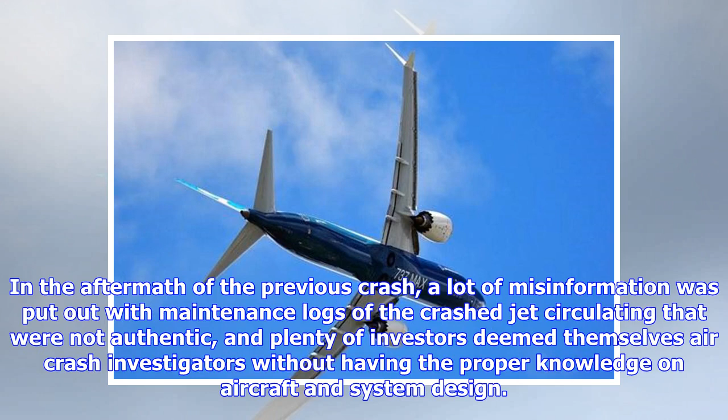In the aftermath of the previous crash, a lot of misinformation was put out with maintenance logs of the crashed jet circulating that were not authentic, and plenty of investors deemed themselves air crash investigators without having the proper knowledge on aircraft and system design.

Source: The New Yorker. When analyzing the Lion Air Boeing 737 MAX 8 crash in October 2018 using my aerospace engineering background, I provided a look at the stability systems in aircraft and explained what changed on the Boeing 737 MAX, as well as my view on one of the key added systems that seems to be causing troubles on the Boeing 737 MAX.

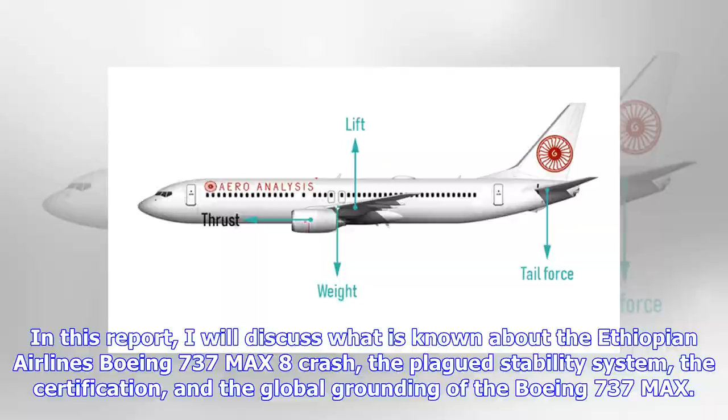In this report, I will discuss what is known about the Ethiopian Airlines Boeing 737 MAX 8 crash, the plagued stability system, the certification, and the global grounding of the Boeing 737 MAX. All of these subjects will be discussed from a technical point of view.

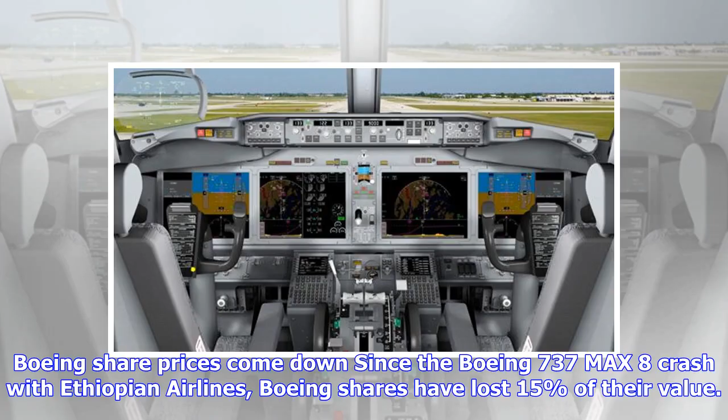In a separate report, I will be providing my view on possible costs of the global grounding of the Boeing 737 MAX. Boeing share price has come down since the Boeing 737 MAX 8 crash with Ethiopian Airlines. Boeing shares have lost 15% of their value.

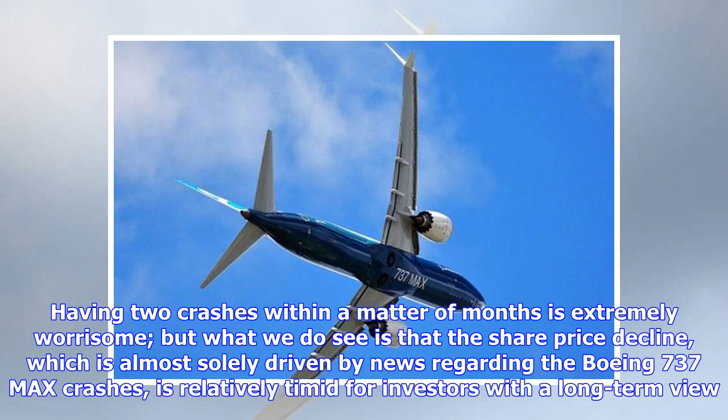Having two crashes within a matter of months is extremely worrisome, but what we do see is that the share price decline, which is almost solely driven by news regarding the Boeing 737 MAX crashes, is relatively timid for investors with a long-term view. Obviously, if a worst-case scenario is being considered, the downside, going forward, is significant.

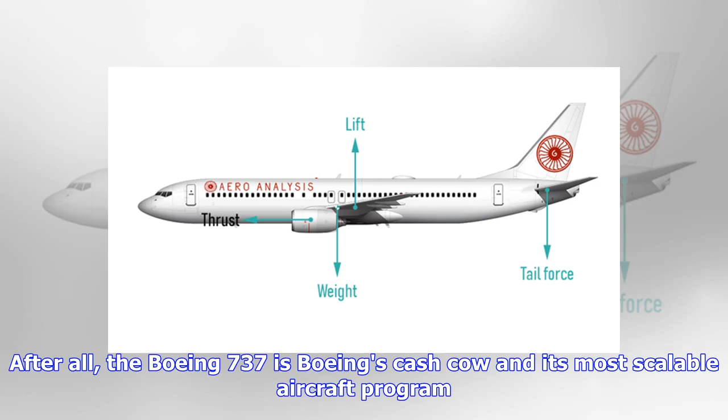But if you currently went solely by the headlines, you would think that Boeing has lost half of its value, and that is not the case. Given the current circumstance, I do believe the downward pressure on shares is more than justified. After all, the Boeing 737 is Boeing's cash cow and its most scalable aircraft program. With the lower share prices, I don't feel that the risk-reward profile has improved.

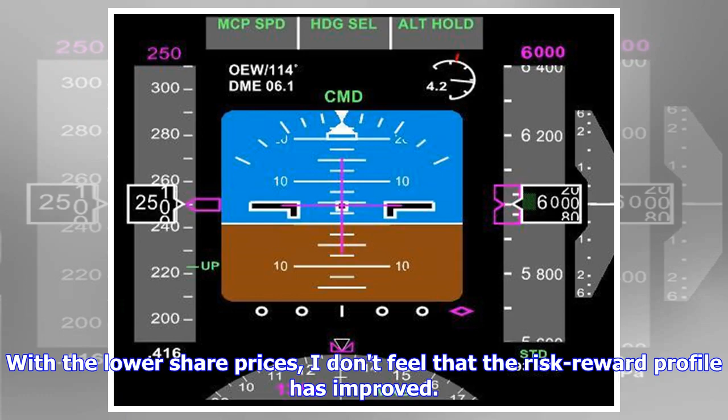After all, there is a risk of cost growth, which will almost certainly be present due to the grounding of the Boeing 737 MAX. Ethiopian Airlines Flight ET302. Source: Flight Global. Ethiopian Airlines Flight ET302 was a flight from Addis Ababa to Nairobi.

The flight is usually operated with either a Boeing 737-800 or a Boeing 737 MAX 8, and on some occasions even a Boeing 787. On the 10th of March 2019, shortly after takeoff, the pilot of a Boeing 737 MAX 8 with registration ET-AVJ requested a return to the airport of Addis Ababa due to technical issues.

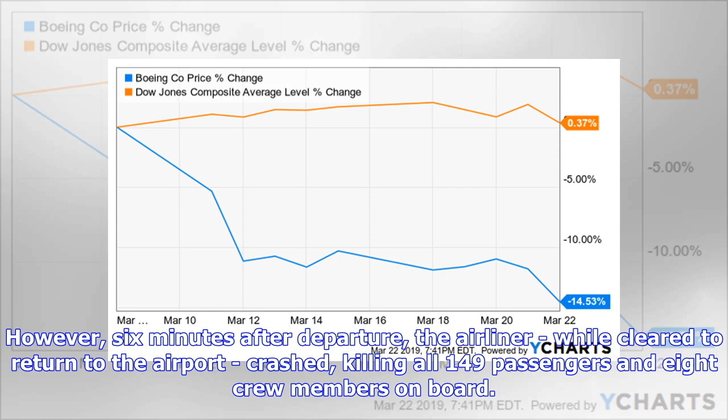However, 6 minutes after departure, the airliner, while cleared to return to the airport, crashed, killing all 149 passengers and 8 crew members on board. No adverse weather conditions were reported.

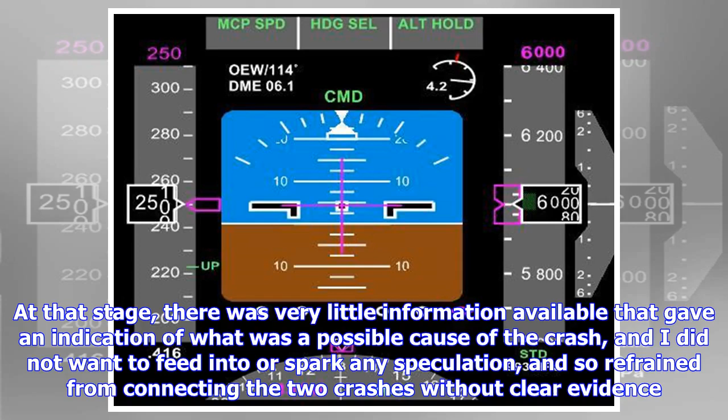Shortly after the accident occurred and with no granular data available, I was already asked to cover the crash and comment on the cause. At that stage, there was very little information available that gave an indication of what was a possible cause of the crash, and I did not want to feed into or spark any speculation, and so refrained from connecting the two crashes without clear evidence.

Currently, more information is known, but there has been no release of even a preliminary report, which is issued within 30 days after a crash. The fact is, however, that this crash marks the second one with a Boeing 737 MAX 8 in 5 months, as well as the second crash since commercial service entry. For an industry that can normally pride itself with an impressive safety record, this is reason for concern.

Shortly after the crash, we observed that both accidents occurred after takeoff during the climb away from the airport, that both flight crews intended to return to their departure airport but were unable to do so, and that both flights were carried out using brand new Boeing 737 MAX 8 aircraft. Later, it was also found that the horizontal stabilizer position was in a nose-down position similar to what happened to the Lion Air MAX 8, and we found the speed to be unusually high.

The aircraft, a Boeing 737 MAX with registration ET-AVJ, was delivered to Ethiopian Airlines on the 15th of November, meaning that it was a little over 100 days old at the time of the crash. It is important to take into account that, without the information on the stabilizer position and/or communications between the air traffic controllers and the flight crew, one could only guess or speculate that these crashes might have had the same cause.

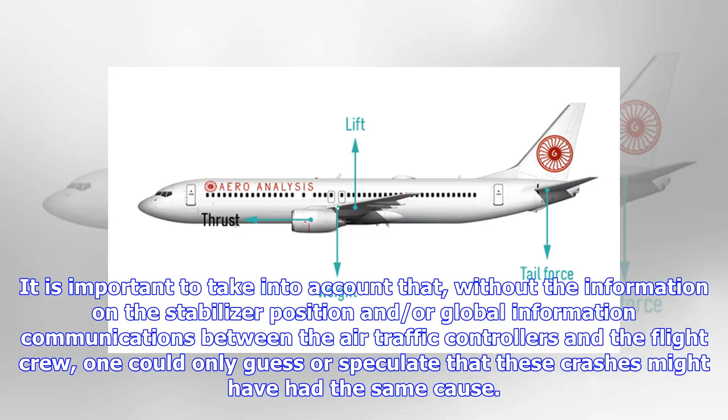Boeing 737 MAX, more than new engines. One of the reasons the problems with the Boeing 737 MAX are somewhat of a surprise is that the Boeing 737 Next Generation has a good safety record, and the Boeing 737 MAX is often seen by others as a re-engined version of the Boeing 737 Next Generation.

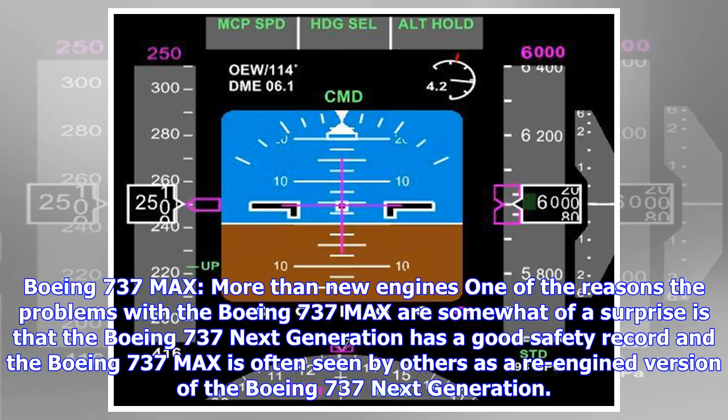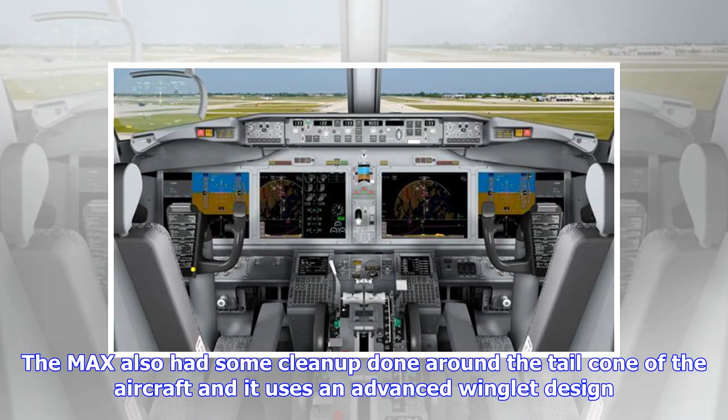Reality, however, is slightly different. The Boeing 737 MAX used CFM LEAP 1B turbofans, which are more efficient than the CFM56-7B series used on the Boeing 737 Next Generation. MAX also had some cleanup done around the tail cone of the aircraft, and it uses an advanced winglet design. These elements reduce the fuel burn of the aircraft, but what is not often considered is the influence this has on stability of the aircraft.

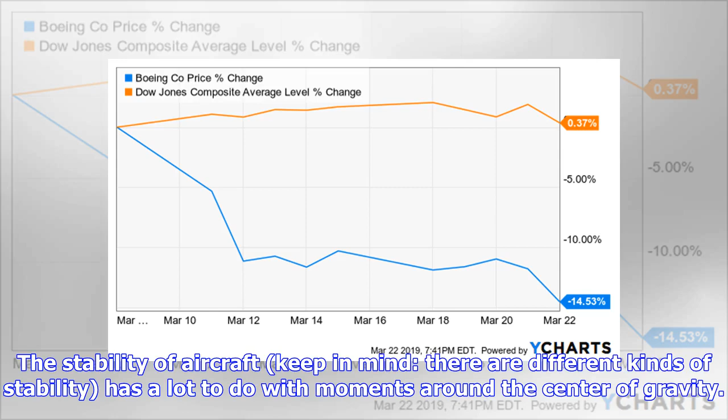Figure 1. Typical setup. Source: Aero Analysis International. When reading the following 4 paragraphs, please keep an eye on Figure 1 to get a better visualization. The stability of aircraft, keep in mind there are different kinds of stability, has a lot to do with moments around the center of gravity. One of those important moments is the pitching moment. What we see in Figure 1 are the forces acting on an aircraft.

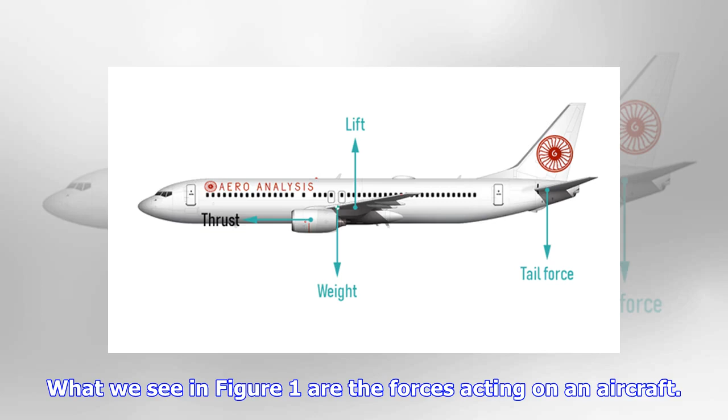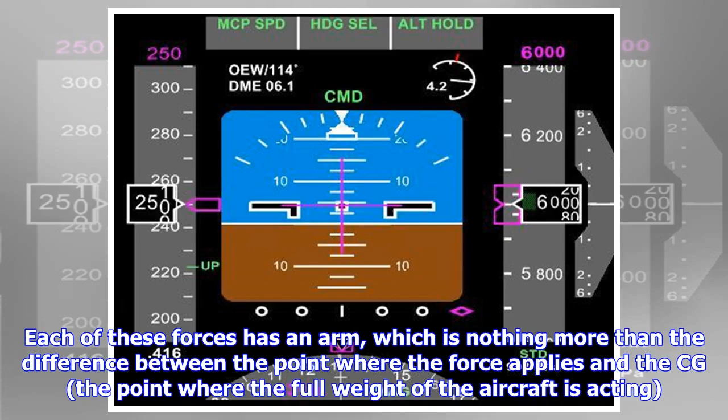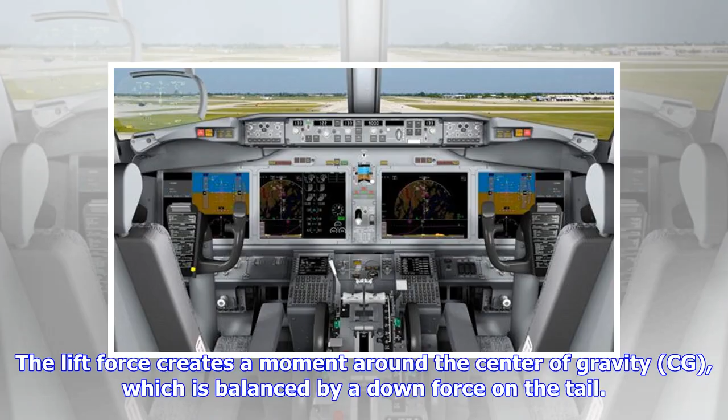Each of these forces has an arm, which is nothing more than the difference between the point where the force applies and the CG, the point where the full weight of the aircraft is acting. Ideally, aircraft have a center of gravity that is placed in front of the center of pressure of the wing, which is the point where the resultant lift force is applied. The lift force creates a moment around the center of gravity, CG, which is balanced by a down force on the tail.

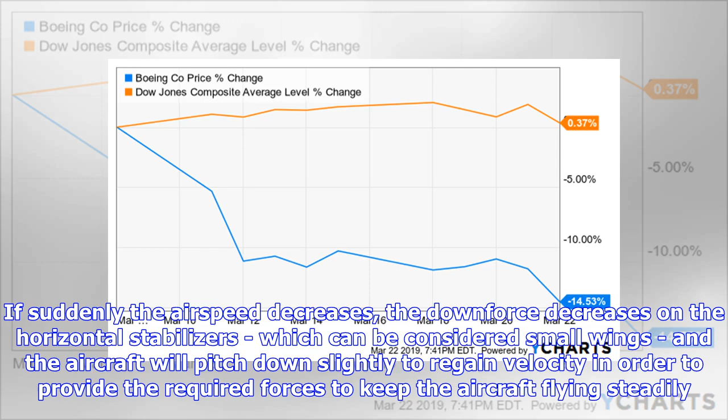What this particular setup with the CG in front of the center of pressure is good for is stability. The force on the surfaces scales with the velocity squared. If suddenly the airspeed decreases, the downforce decreases on the horizontal stabilizers, which can be considered small wings, and the aircraft will pitch down slightly to regain velocity in order to provide the required forces to keep the aircraft flying steadily. The same, but in opposite sense, holds for a sudden increase in velocity. This is known as positive static stability.

Additionally, if the CG does not lie on the same line with the point where the thrust force is applied, there also is a pitch-up moment from the turbofans. That is where the new turbofans play a role. The new turbofans are not only more efficient, they are also more powerful and placed slightly higher and more forward on the wing. The result is that the nacelles generate some more lift in front of the center of gravity, which works as slightly destabilizing, and the more powerful turbofans generate a bigger pitch-up tendency for the aircraft.

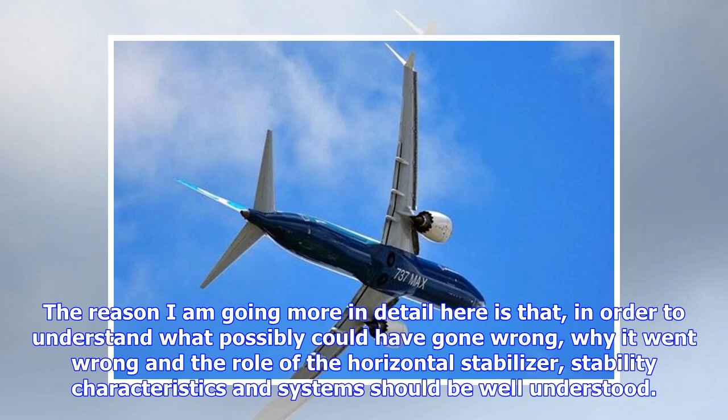The reason I am going more in detail here is that, in order to understand what possibly could have gone wrong, why it went wrong and the role of the horizontal stabilizer, stability characteristics and systems should be well understood. It is important to have a stable aircraft that doesn't contribute to further destabilizing behavior when moved from its equilibrium point.

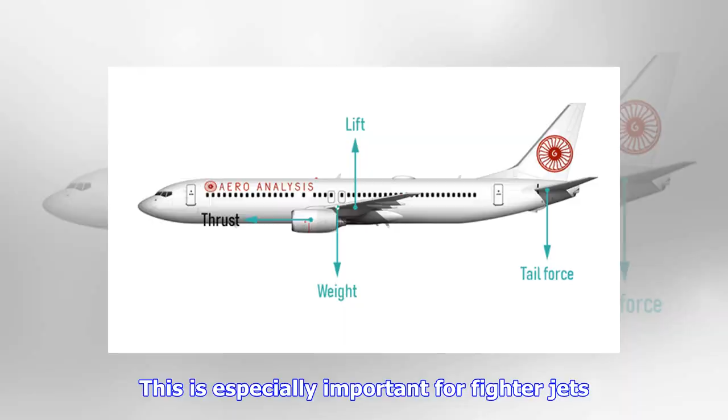It is possibly one of the hardest things for which to naturally or aerodynamically design the aircraft. That is also the reason aircraft, and primarily fighter jets, can nowadays be designed with unstable behavior and the aircraft is stabilized by computer systems. This improves maneuverability characteristics. This is especially important for fighter jets. For passenger jets, designing aerodynamically stable aircraft is still desired, and unstable characteristics can be handled by augmentation systems if needed. Having a forward CG has some stability benefits.

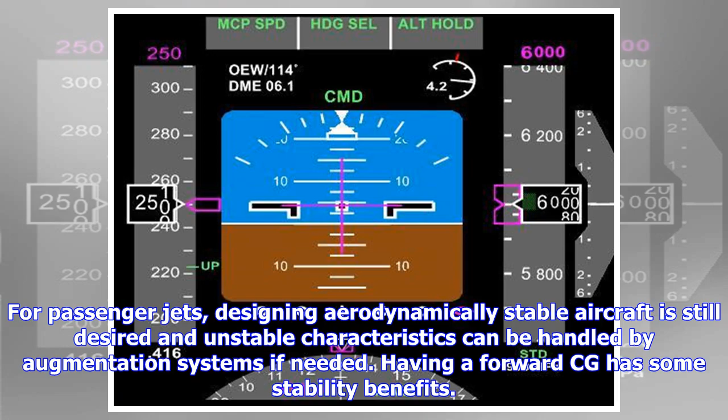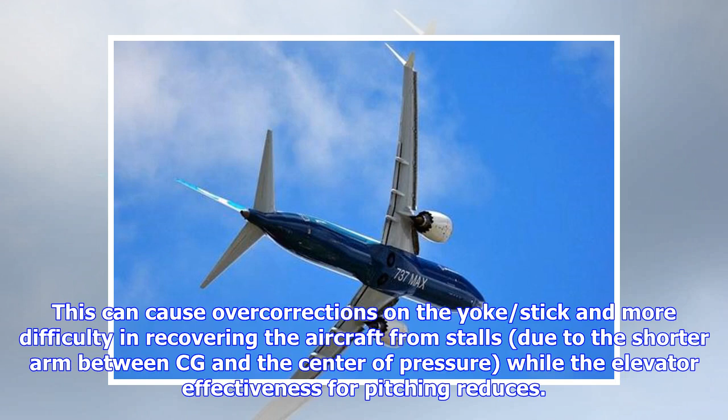The CG, however, is not a fixed point and changes based on loading and even changes as the aircraft consumes fuel from its tanks. In an aircraft that flies nearly empty, the CG will shift more aft and that will ultimately result in a reduced moment arm for the tail force and lift force, and less tail force, resulting in less control force required by the pilot. This can cause overcorrections on the yoke or stick and more difficulty in recovering the aircraft from stalls, due to the shorter arm between CG and the center of pressure, while the elevator effectiveness for pitching reduces. This, however, is not bad design or dangerous. The aircraft should be easily operable within the limits set by the manufacturer.

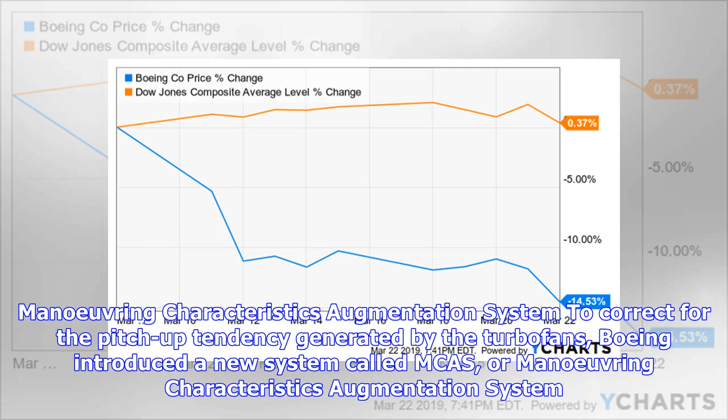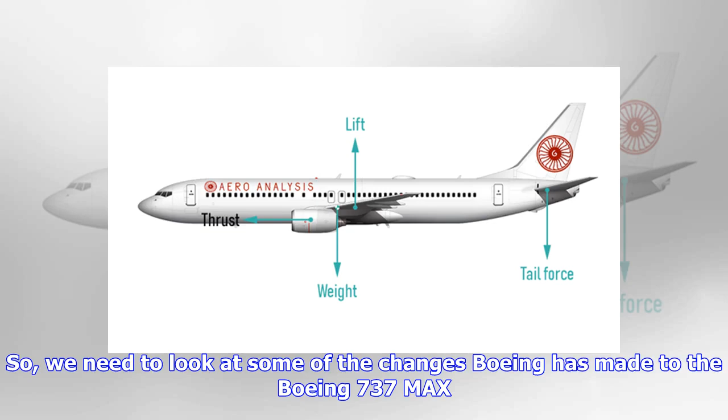Maneuvering Characteristics Augmentation System. To correct for the pitch-up tendency generated by the turbofans, Boeing introduced a new system called MCAS, or Maneuvering Characteristics Augmentation System. Before we explain what the system does, we need to look at why Boeing implemented it. So, we need to look at some of the changes Boeing has made to the Boeing 737 MAX.

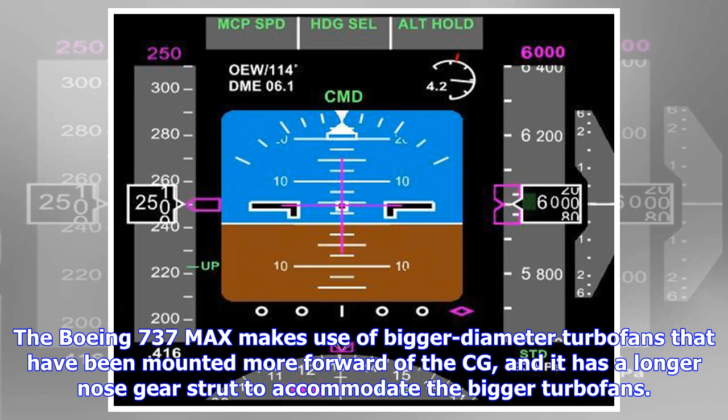The Boeing 737 MAX makes use of bigger diameter turbofans that have been mounted more forward of the CG, and it has a longer nose gear strut to accommodate the bigger turbofans. Those are items that add weight to the aircraft in front of the CG and would make the aircraft pitch down. So, it changes how the aircraft would handle as compared with the previous generation Boeing 737.

Additionally, there is quite a difference in the thrust capabilities. The turbofan powering the Boeing 737 NG series, the CFM56-7B series, has a continuous thrust of 115.2 kN, while the CFM LEAP 1B series that powers the Boeing 737 MAX has a continuous thrust of 127.6 kN, which is a 10% increase. So that would create a pitch-up moment that the Boeing 737 NG has to a lesser extent.

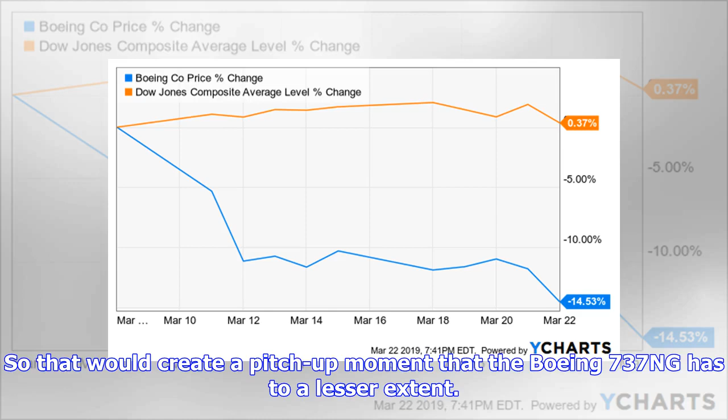Additionally, these bigger turbofan diameters possibly cause the nacelles, the housing of the turbofan, to generate lift or more lift at higher angles of attack, the angle between the aircraft body or wing chord and the relative wind, inducing a further pitch-up moment. This all adds to the instability of the aircraft and makes it harder to control at higher angles of attack during high-thrust situations, since the aircraft will tend to pitch up while stall prevention or recovery requires a pitch-down motion.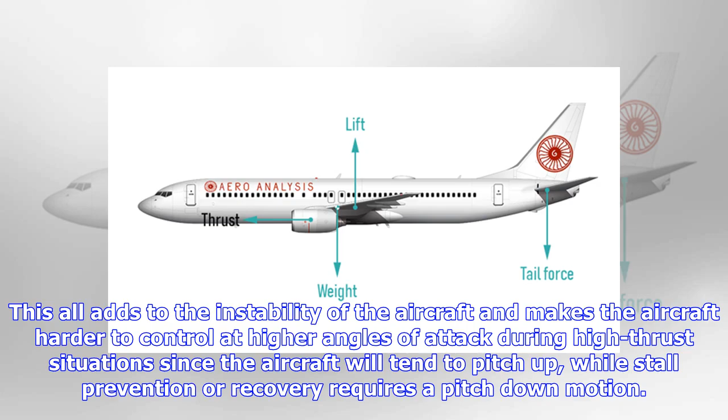The particular combination of high thrust and high angles of attack is typical for the takeoff phase of the flight.

The MCAS is the system on the Boeing 737 MAX that went from an unknown system to the most known system on the aircraft. Fact is that if there had been no crash, nobody would have known that the system had malfunctioned or that it had even existed.

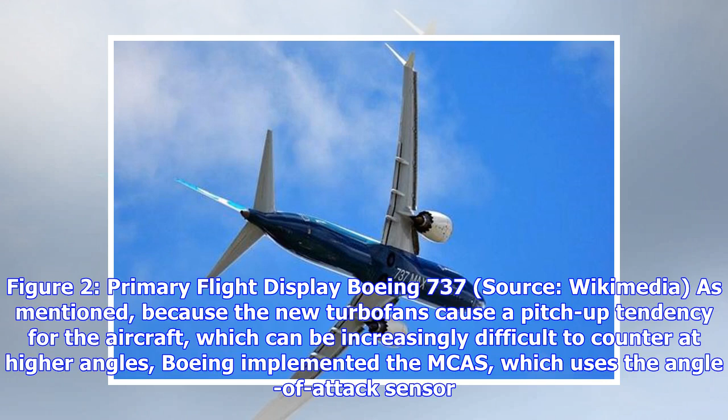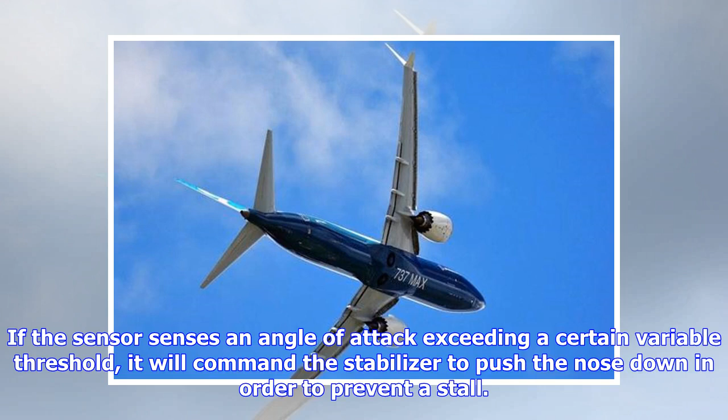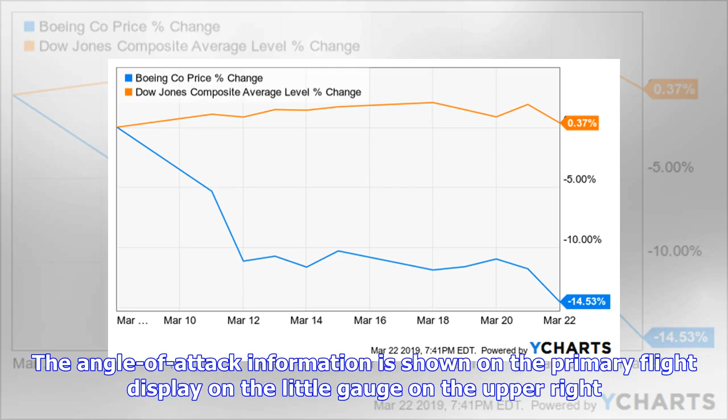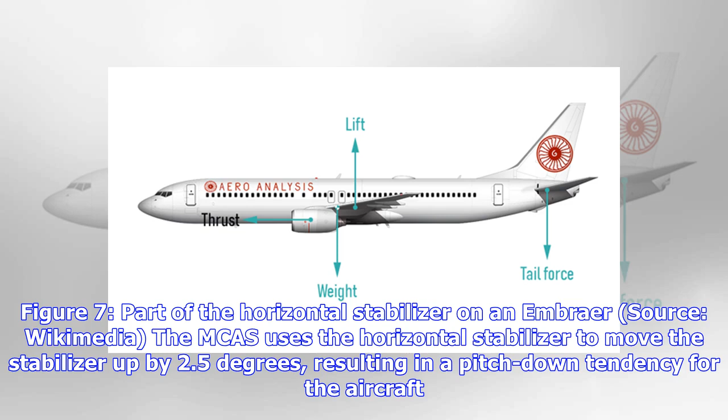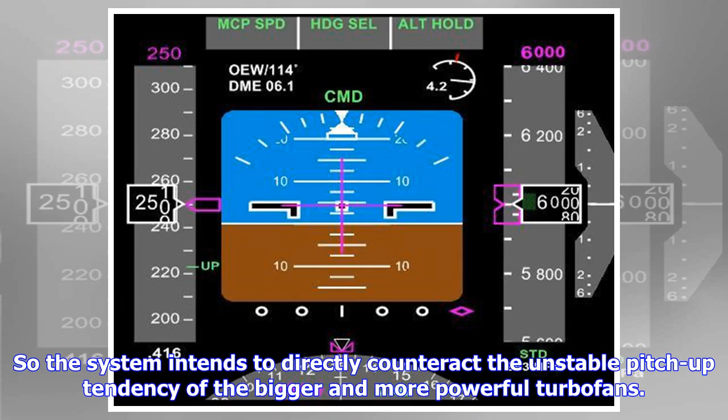What seems to have happened for the second time now is that the nose of the aircraft has been pushed down, likely due to wrong input from an angle of attack sensor.

Boeing's role during the first crash in October: I was already critical of Boeing's role in MCAS design, something that hasn't always been appreciated by Boeing investors.

Boeing introduced the MCAS system, and the rationale behind it is very simple. The Boeing 737 MAX is slightly more unstable, so they introduced a system that should help crews avoid stalling. We think they should have informed crews about it. Boeing said it did not disclose the system to pilots in order to avoid flooding them with information.

We think following that rationale is only partially justified. The MCAS is a stall prevention system, and it could indeed partially defeat the purpose of the system if you tell pilots about it and tell them how to circumvent that. But if the system is not tuned or designed correctly, you had better make sure that crews know how to deactivate the system reflexively without them having to look for the right checklists.

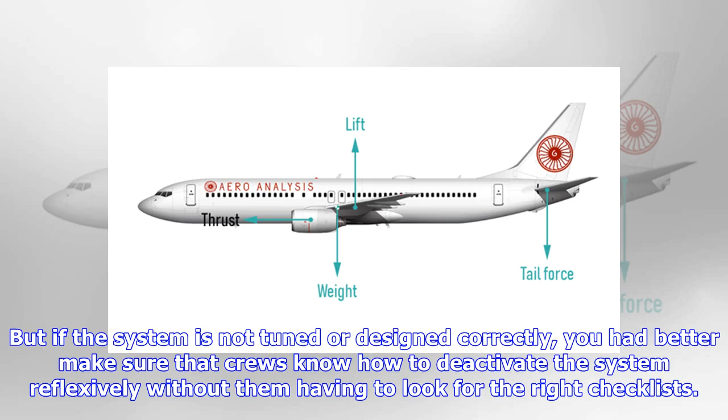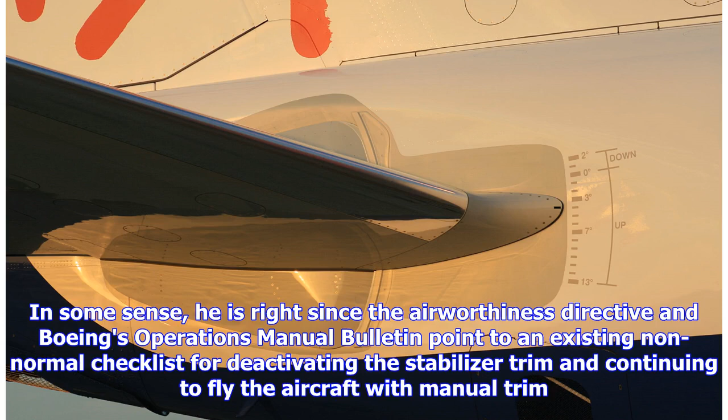Boeing CEO Dennis Muilenburg said that they disclosed everything necessary to fly the aircraft safely. In some sense, he is right, since the Airworthiness Directive and Boeing's Operations Manual Bulletin point to an existing non-normal checklist for deactivating the stabilizer trim and continuing to fly the aircraft with manual trim. This would have deactivated the MCAS, which is the system that pilots didn't know about.

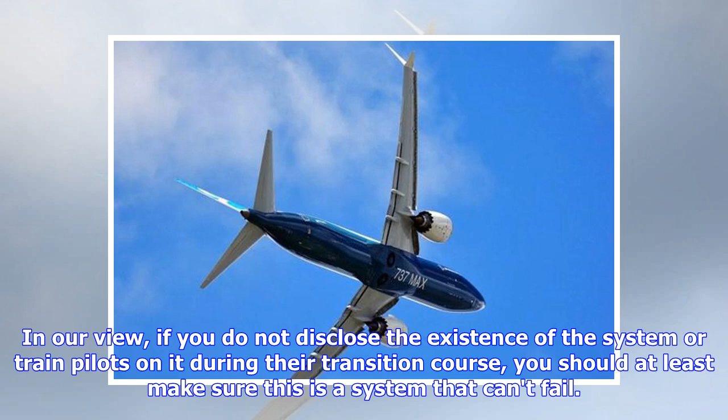What was missing, however, was the link between horizontal stabilizer, MCAS, and the angle of attack sensor in the checklist. In our view, if you do not disclose the existence of the system or train pilots on it during their transition course, you should at least make sure this is a system that can't fail. This is nearly impossible.

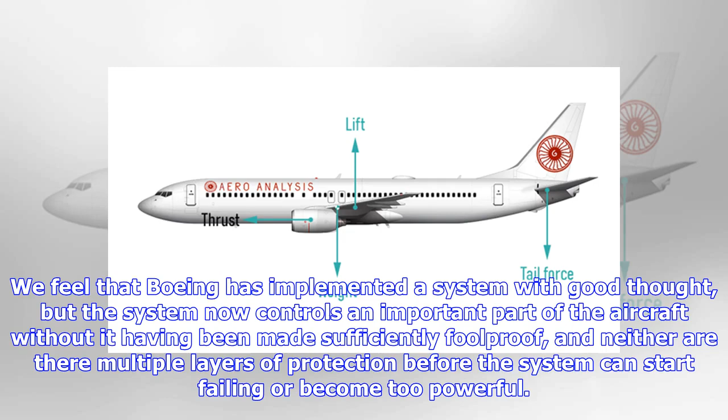So it is desirable to build in some buffer in the form of additional sensors, for example, besides the left-right sensors for the left and right seat of the flight deck. We feel that Boeing has implemented a system with good thought, but the system now controls an important part of the aircraft without it having been made sufficiently foolproof, and neither are there multiple layers of protection before the system can start failing or become too powerful.

We think Boeing should have documented the changes during the transition course for pilots and added explanation as to how the MCAS and STS are different and whether they even coexist on the Boeing 737 MAX.

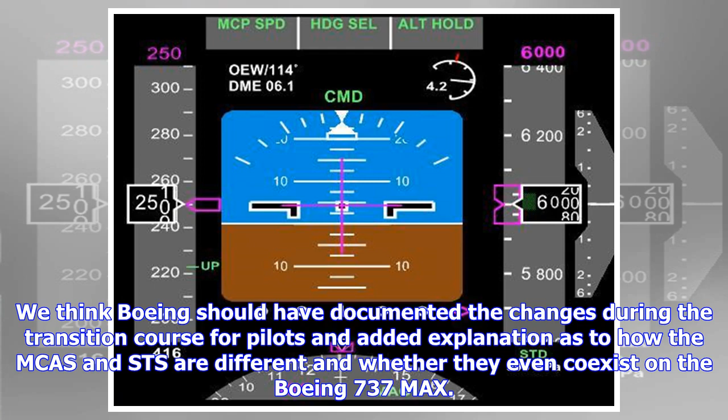All of the above might sound extremely familiar to those who have read my coverage on the Lion Air crash, because my view on Boeing's MCAS design, information and training has remained unchanged.

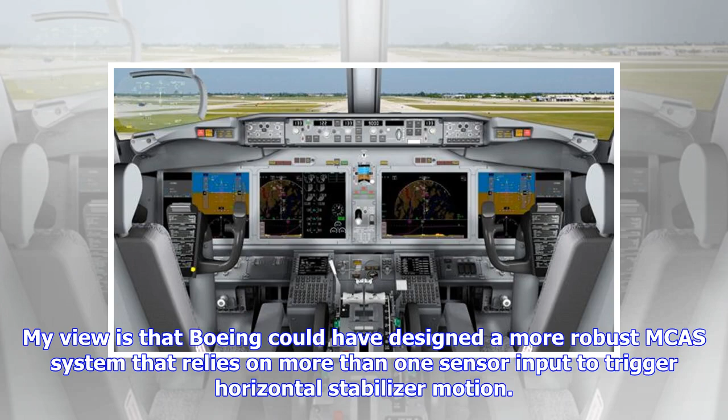My view is that Boeing could have designed a more robust MCAS system that relies on more than one sensor input to trigger horizontal stabilizer motion. In not doing so, Boeing has greatly underestimated the importance of the system and the adverse consequences of system failure with regard to controllability of the aircraft.

Boeing engineers undoubtedly are extremely talented, and workers take pride in building Boeing jets, but if you have an aerospace engineering background, you can only conclude that the MCAS design has been suboptimal.

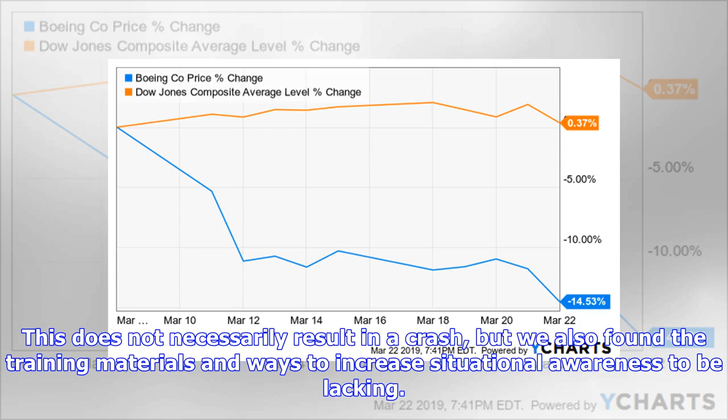This does not necessarily result in a crash, but we also found the training materials and ways to increase situational awareness to be lacking. The training simulators don't even deal with MCAS failure scenarios. If you combine this with lacking documentation and inferior system design, you can only conclude that Boeing did not give flight crews the tools and knowledge to fully understand the differences between the MAX and the NG and to deal with MCAS failures.

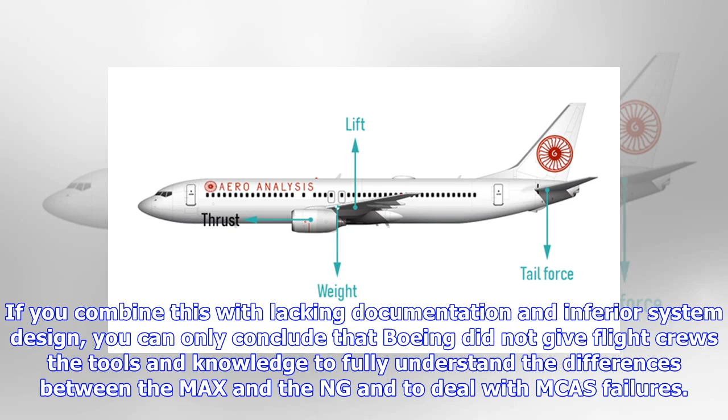Boeing's role is not just to design, flight test, acquire certification, assemble and deliver aircraft. It also has a role in ascertaining robustness of the training materials available to those flying the aircraft.

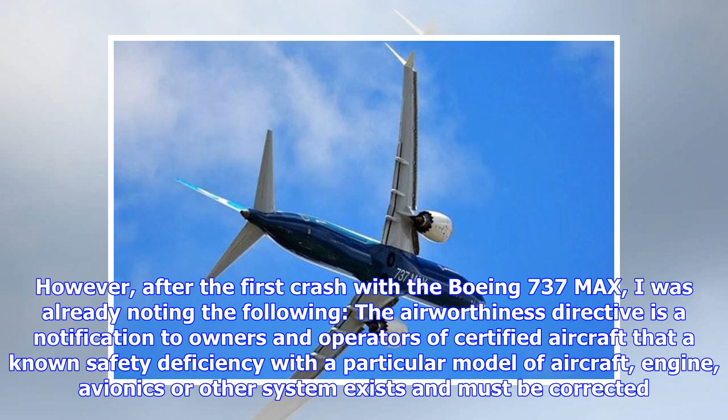Currently, the role of the Federal Aviation Administration is being probed, and this has come as a shock to many. However, after the first crash with the Boeing 737 MAX, I was already noting the following: the Airworthiness Directive is a notification to owners and operators of certified aircraft that a known safety deficiency with a particular model of aircraft, engine, avionics or other system exists and must be corrected. So it's an extremely strong sign from the FAA.

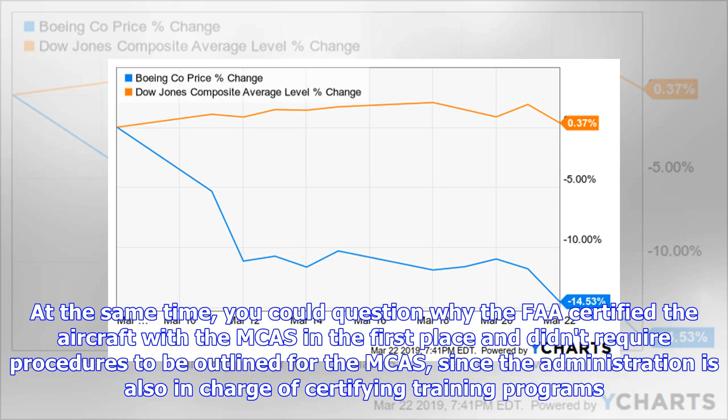At the same time, you could question why the FAA certified the aircraft with the MCAS in the first place and didn't require procedures to be outlined for the MCAS, since the administration is also in charge of certifying training programs. The FAA is likely the most capable aviation certifying administration in the world, yet they seem to know about the MCAS and did not require additional pilot training on the MCAS.

The Brazilian administration did require additional training on the anti-stall system.

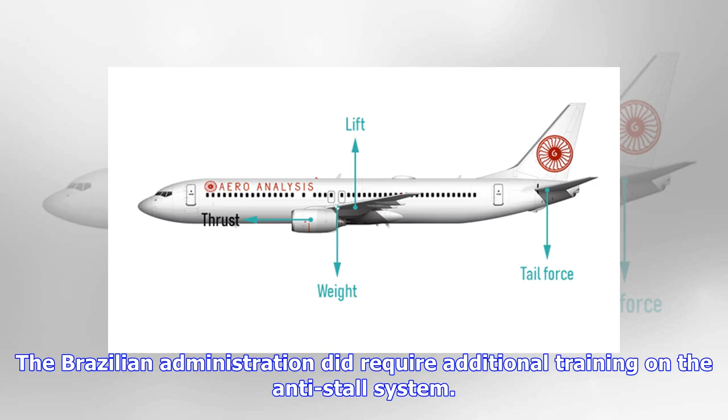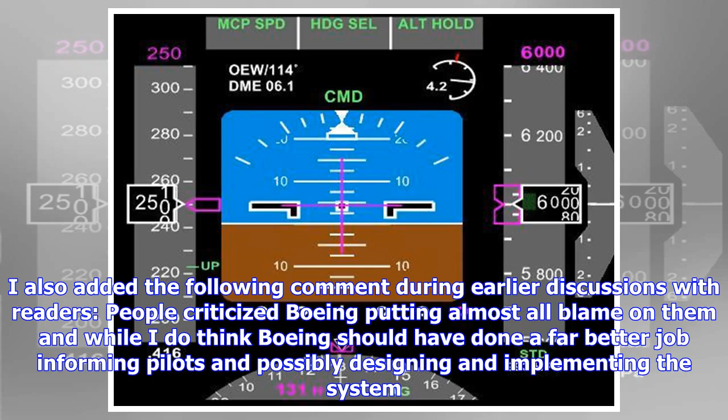I also added the following comment during earlier discussions with readers. People criticized Boeing, putting almost all blame on them, and while I do think Boeing should have done a far better job informing pilots and possibly designing and implementing the system, also the role of the FAA should be investigated to see whether they actually have the capabilities to certify aircraft that are

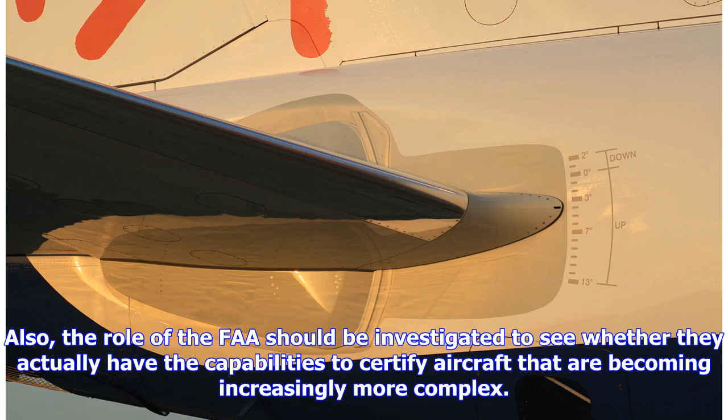becoming increasingly more complex. You could say that what is making headlines today, readers on Seeking Alpha were already made aware of in December 2018.

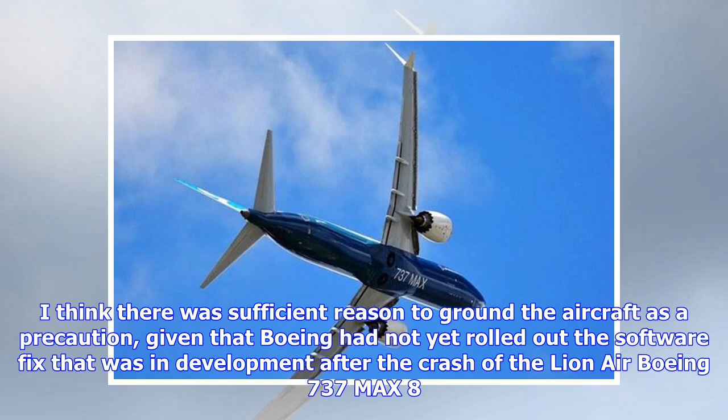In the aftermath of the Ethiopian Airlines crash, China initiated the grounding of the Boeing 737 MAX. I think there was sufficient reason to ground the aircraft as a precaution, given that Boeing had not yet rolled out the software fix that was in development after the crash of the Lion Air Boeing 737 MAX 8. One thing to consider is that China operates nearly 100 Boeing 737 MAX aircraft that it relies on to support demand for air travel, so the grounding should be viewed in the safety and demand framework rather than that of the trade war and politics.

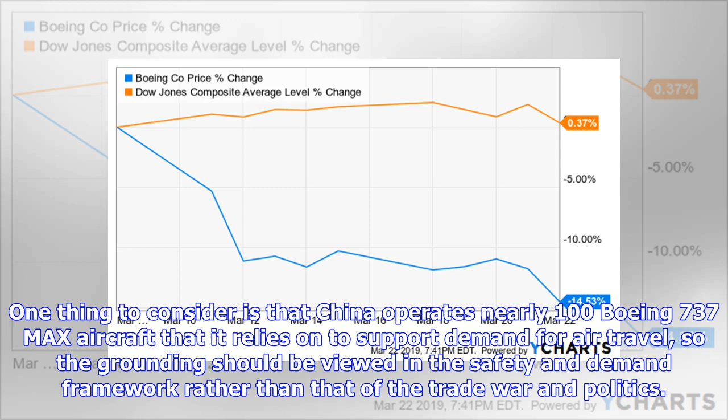It is of importance to China that passenger confidence in the Boeing 737 MAX is not eroded any further because Airbus, COMAC simply can't support the demand for single-aisle jets by themselves.

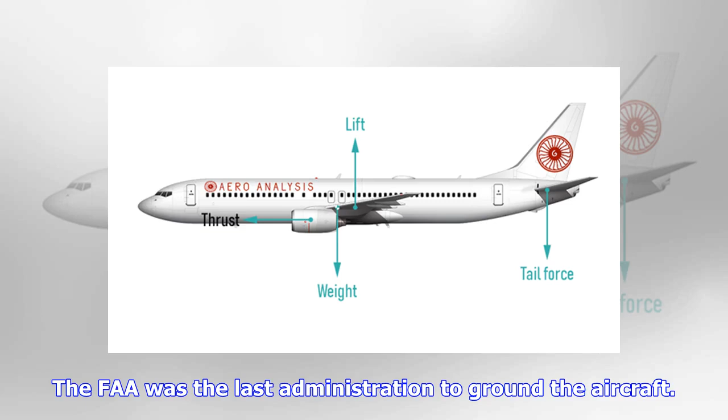The FAA was the last administration to ground the aircraft. Why the FAA did not ground the jet earlier is not clear, but I can imagine it is because the FAA does not get off scot-free in this case.

In the aftermath of the first crash, Boeing had been working on a software fix that would have turned off the MCAS in case the pilot opposed the MCAS system multiple times. The way it looks now is that neither Boeing nor the FAA has properly assessed the power of the MCAS system, and they have underestimated the consequences of the failure of this particular system.

This raises the question as to how the FAA was able to certify something when they didn't understand the extent to which it affects the stability of the aircraft. The question that would immediately follow is how the FAA determined the Boeing 737 MAX was safe to fly after the Lion Air crash and issued a continued airworthiness directive after the Ethiopian Airlines crash. It simply does not add up.

You could even say that the FAA, having been the last to ground the aircraft and even having issued a continued airworthiness directive, has gambled its own credibility.

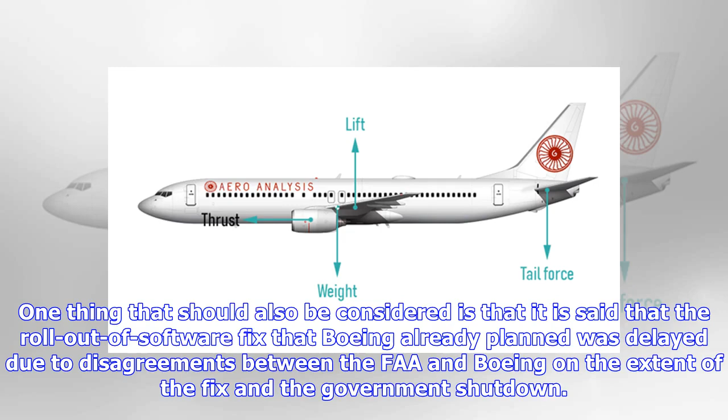One thing that should also be considered is that it is said that the rollout of the software fix that Boeing already planned was delayed due to disagreements between the FAA and Boeing on the extent of the fix, and the government shutdown. That said, acting FAA Administrator Daniel Elwell denied any delay relating to the December to January government shutdown.

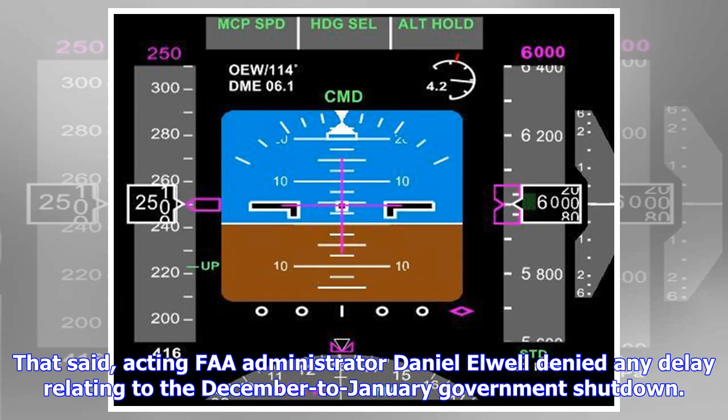We are now seeing broad media coverage on the role of the FAA, but those who have been reading my work have already seen me putting a big question mark on the role the FAA plays here.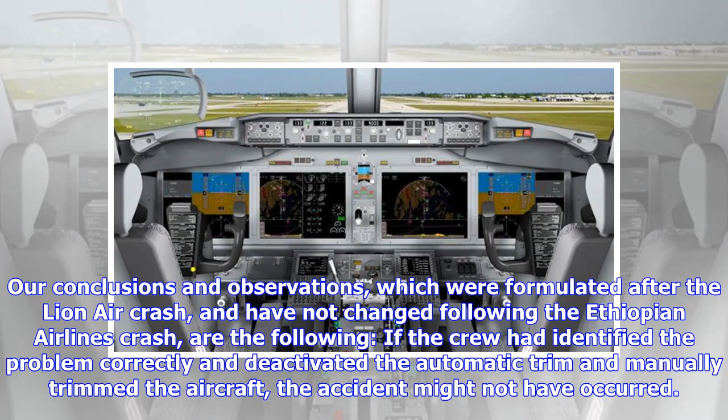Our conclusions and observations, which were formulated after the Lion Air crash, and have not changed following the Ethiopian Airlines crash, are the following: if the crew had identified the problem correctly and deactivated the automatic trim and manually trimmed the aircraft, the accident might not have occurred. If Boeing had put together operating procedures, checklists, and training for an AOA sensor malfunction and an introduction to MCAS in a transition course, the accident might not have occurred.

If Boeing or its supplier had designed a more robust AOA sensor or MCAS, the accident might not have occurred. If the FAA had required Boeing from the start to inform pilots about the MCAS, the accident might not have occurred. If the FAA had required a more robust design for an important augmentation system such as the MCAS, the accident might not have occurred.

Crew and automatization in the cockpit.

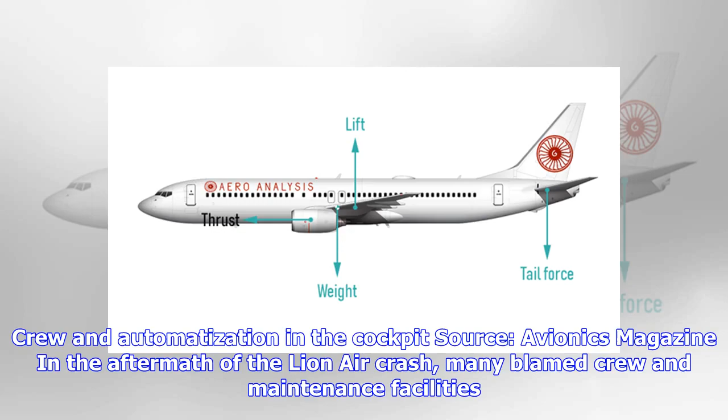Source, Avionics magazine. In the aftermath of the Lion Air crash, many blamed crew and maintenance facilities. Indeed, Lion Air does not have the best safety record. Ethiopian Airlines, however, is an airline that has good maintenance and training facilities.

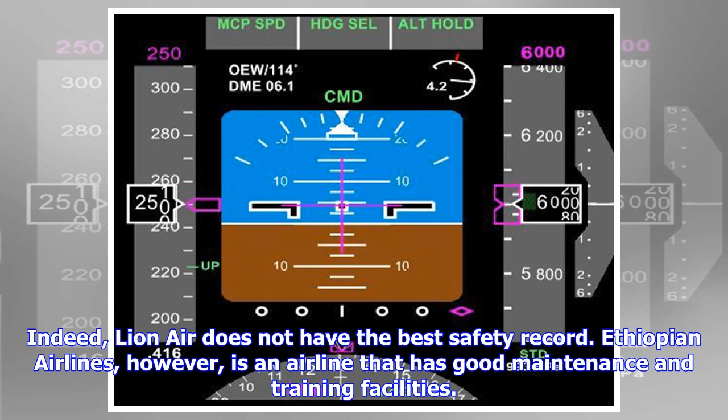The captain had over 8,000 hours of flying experience, while the second officer had 200 hours. Admittedly, the second officer did not have a lot of experience, but this does not mean the flight crew is to blame for the crash.

As I have noted previously, during air crashes often there is no single reason for a crash but, rather, an unfortunate chain of events leads to the crash wherein each link in the chain has a different weight. Blaming flight crews after a crash is easy, but it should also be pointed out that flight crews should be handed the right tools to operate the aircraft.

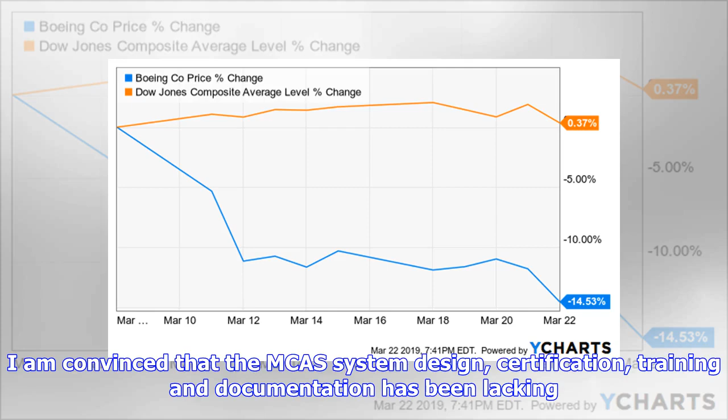I am convinced that the MCAS system design, certification, training and documentation has been lacking. Flight decks have become more and more automated over the years, and nowadays everything is shown on big displays. That plays a role as well.

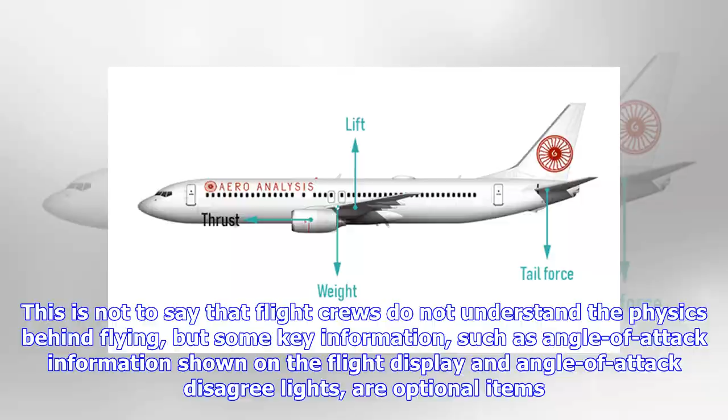This is not to say that flight crews do not understand the physics behind flying, but some key information, such as angle of attack information shown on the flight display and angle of attack disagree lights, are optional items. These items greatly increase situational awareness, but some airlines have decided against purchasing these optional items. In the aftermath of the accidents, the angle of attack disagree lights will become standard.

Had these lights been installed earlier, a malfunctioning MCAS could have been noted. Airlines will also be able to have the angle of attack information shown on the primary flight display at no cost.

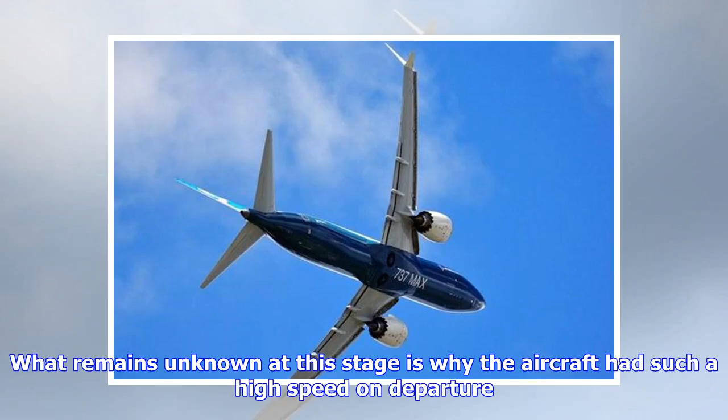What remains unknown at this stage is why the aircraft had such a high speed on departure. An additional big question mark is why, despite clear instructions in the emergency directive from the FAA and in Boeing's service bulletin about turning off the MCAS, the Ethiopian Airlines Flight 302 experienced fluctuations in the vertical speed and ended up pitching down.

So, while everything seems to be clear, it is still not clear whether there were additional malfunctions or complications during the flight, and whether the crew did follow the non-normal checklists for runaway stabilizers that Boeing and the FAA emphasized after the Lion Air crash, or whether the functioning or power of the MCAS has been underestimated or not understood.

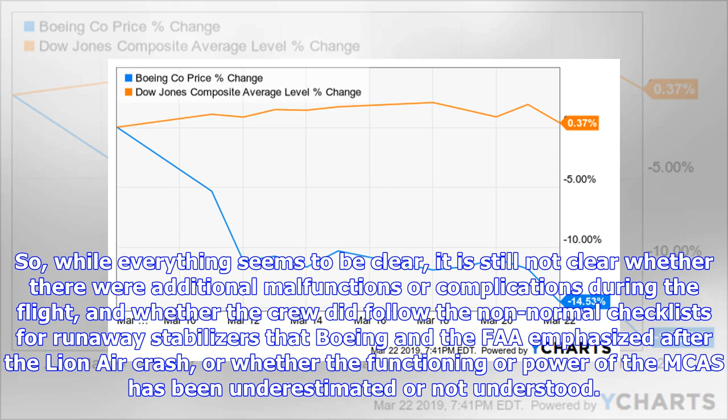Conclusion: the Boeing 737 MAX crash was a tragic one, since it is highly likely that the accident could have been prevented if the software fix had been rolled out. I think the idea behind MCAS is good, but the execution, design, and certification have been poor, and that raises questions regarding the role of Boeing and the FAA.

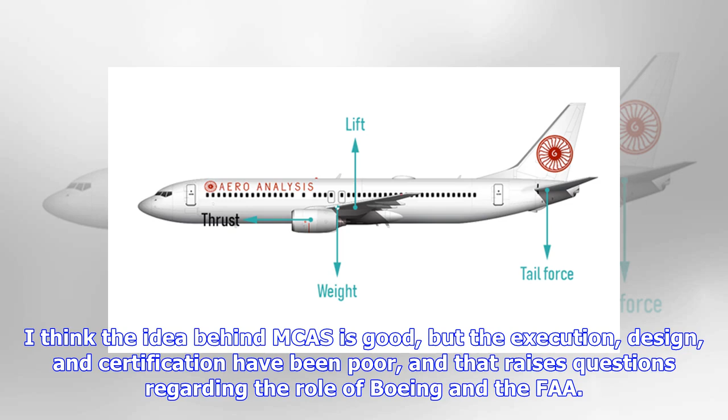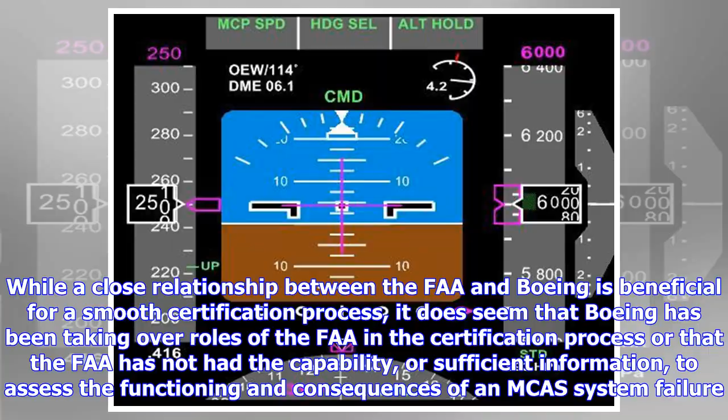While a close relationship between the FAA and Boeing is beneficial for a smooth certification process, it does seem that Boeing has been taking over roles of the FAA in the certification process, or that the FAA has not had the capability, or sufficient information, to assess the functioning and consequences of an MCAS system failure. Keeping all factors in mind, the grounding is more than justified and possibly even came too late.

The preliminary report has yet to be published. One of the things I'd like to see it shed more light on is, even if the MCAS played a role, why the Ethiopian Airlines Boeing 737 MAX had a relatively high speed. It is key for Boeing to show their commitment to safety and give certifying agencies and flight crews all of the information required to certify and fly the aircraft.

Confidence in the Boeing 737 MAX and the FAA is currently dented, there is no question about that, and all civil aviation administrations will be monitoring these developments closely before they will allow the MAX back in the skies. A green light from the FAA won't be the most convincing sign that the MAX is meeting safety guidelines, but a green light from other agencies, such as the Chinese and European regulators, will play a key role here.

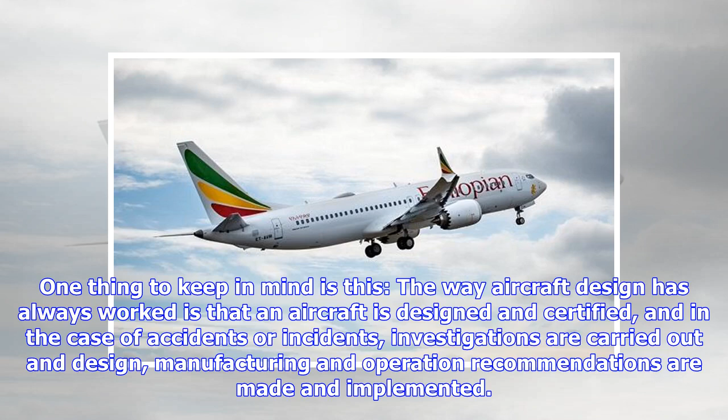One thing to keep in mind is this: the way aircraft design has always worked is that an aircraft is designed and certified, and in the case of accidents or incidents, investigations are carried out and design, manufacturing and operation recommendations are made and implemented. The Boeing 737 MAX accidents are tragic because lives were lost, but we should also keep in mind that this industry, like every other industry, has always functioned in this way.

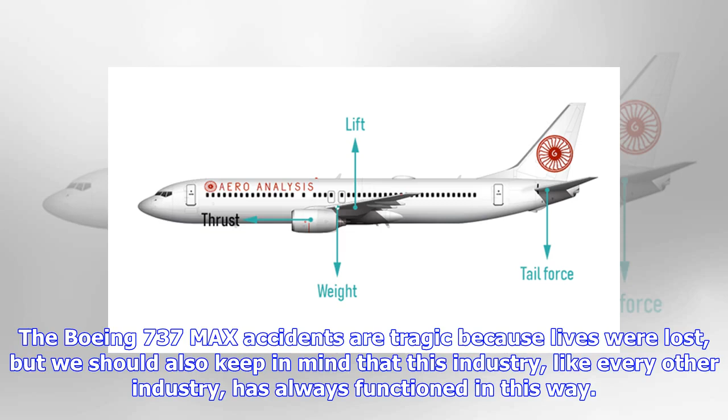What makes the Ethiopian Airlines Boeing 737 MAX crash extra painful is that, to me, it does seem like that if almost all parties involved had done a better job, a fatal crash could have been prevented.